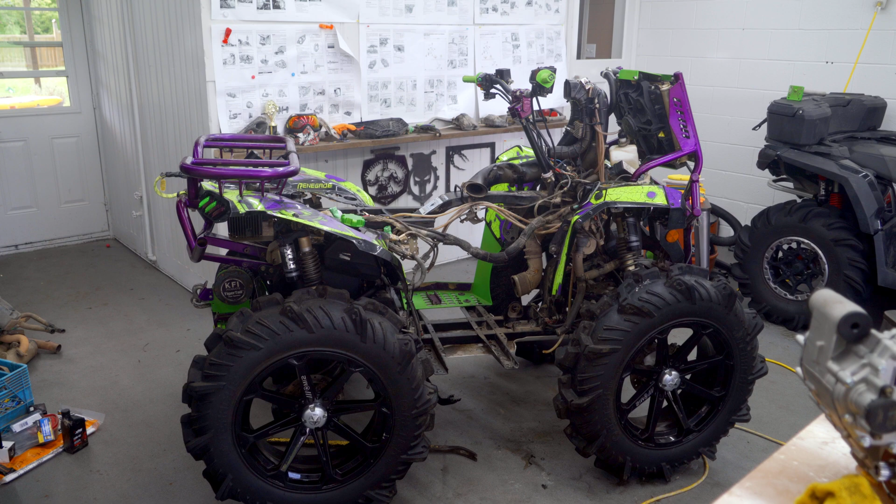On this episode, I'm going to show you how to put an engine back into a 2020 Can-Am Renegade XMR 1000R. Same way you take it apart is the same way you put it back together. So let's get to it. Let's get that engine back in the frame.

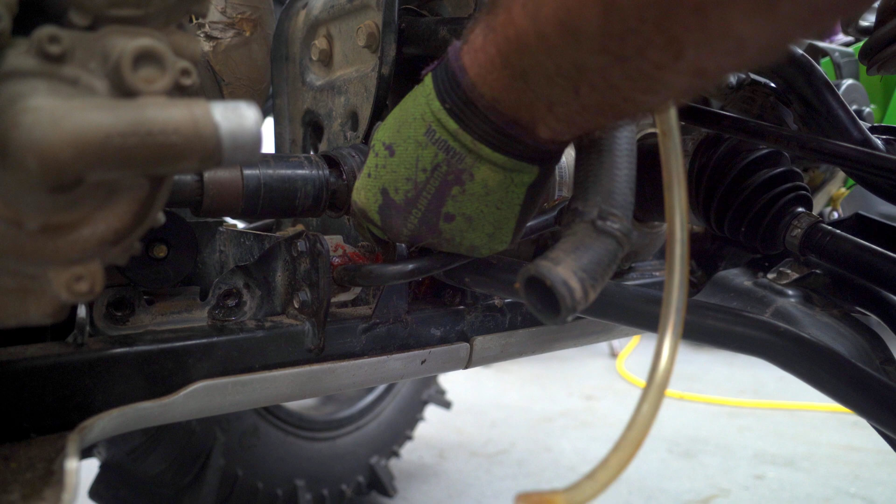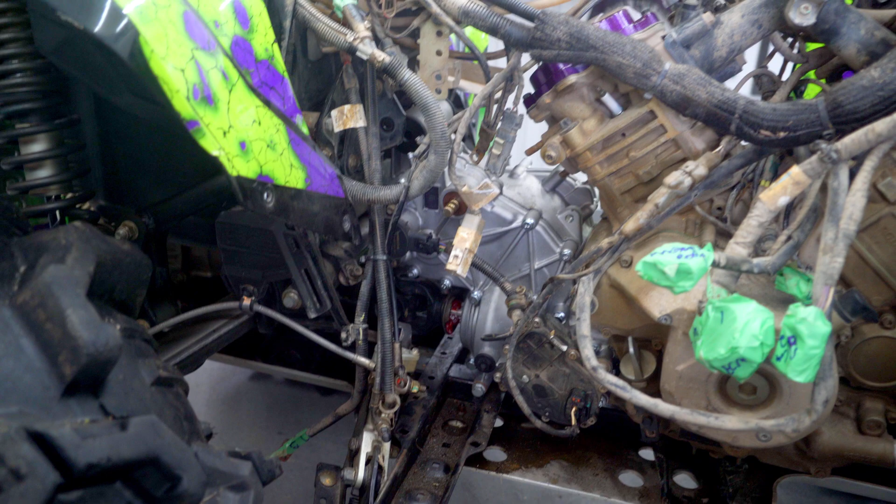Slide your prop shaft in. Have to get all the clamps back on there. New Oetiker clamps. But make sure that you put this in before your engine bolts. Before you push the engine and gearbox back in, make sure you line up your drive shaft splines. They're a lot easier to line up right now while everything's loose.

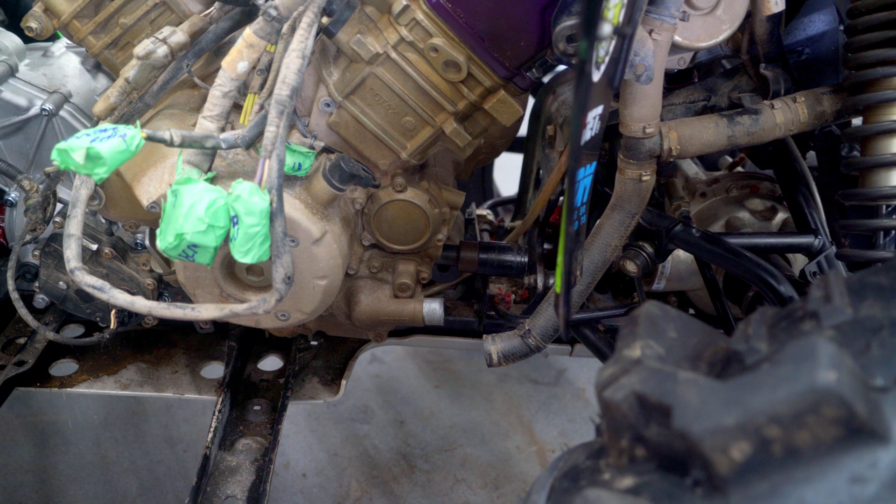I have things kind of lined up for the upper engine mount and the lower one down there. So now we're going to slide her into place. Little movements now, right? Make sure that you're not pinching anything and everything's routed the proper way. I think I'm good there. This guy here, when you slide it back, make sure you flip that back over the throttle body. Pretty important to make sure it's on the right hand side before you put all your engine bolts back in. And then now I'm going to keep it on here until she gets into place.

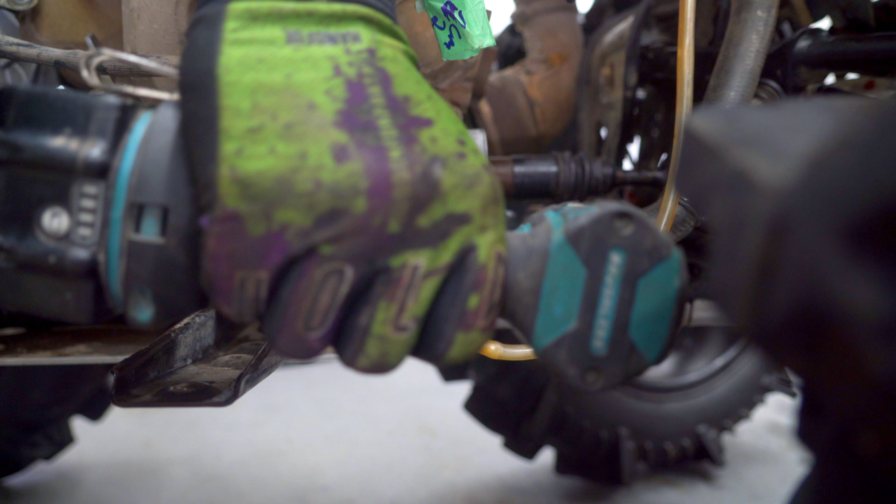Tight. A little bit of blue Loctite goes a long way. Upper engine mounts up here. Threads right into the engine. 15 mil. And all I'm going to do here is snug everything up, because I'm going to make sure that everything is in the right spot before I start tightening everything down.

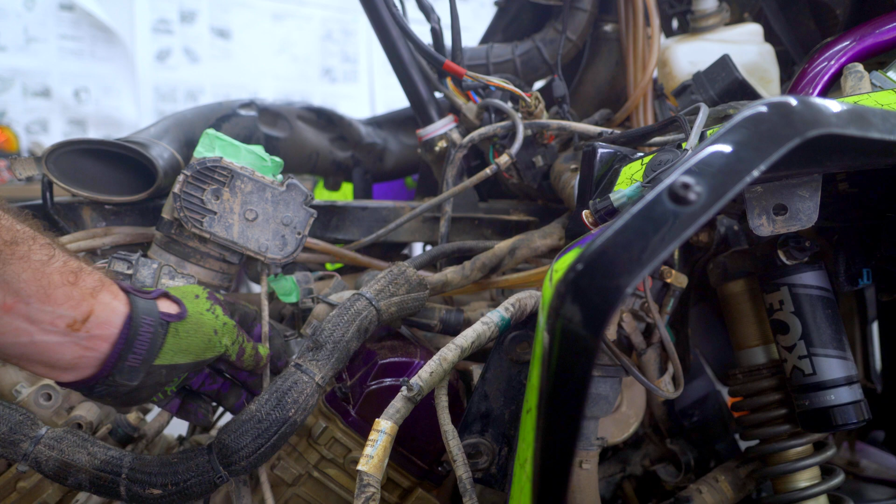Now we start running our electrical and everything back to what it's supposed to be connected to. Spark plug wires up here. The shorter one goes to the front cylinder. The longer one up here goes to the back cylinder. Route it however you see fit. I'm gonna route it back the same way that it came.

Voltage rectifier right here. This guy here, yellow on it. This guy goes under the back, over on the back side here. So we're gonna run that back, and that has to go through here, underneath, and plug in the back. A little bit of dielectric grease on it goes a long way. Let's get that done.

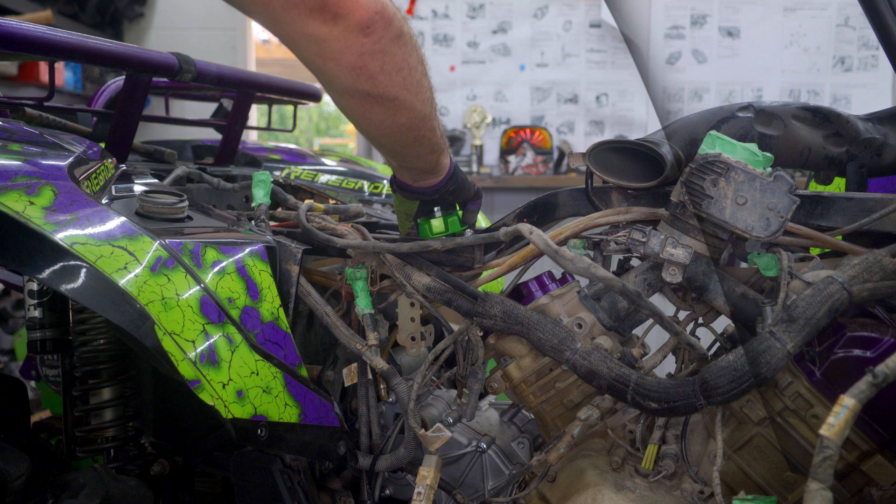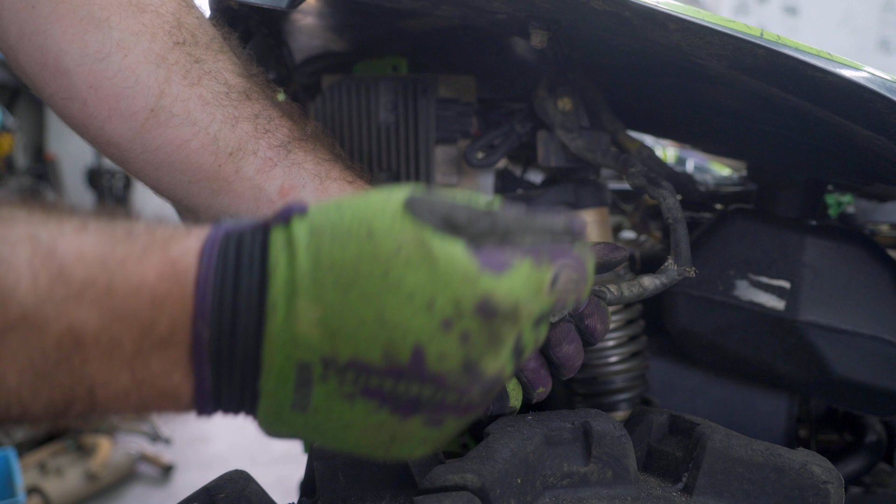A little bit of dielectric grease in the connection before we put it back together. Make sure that you don't get it on the actual contacts, because remember, dielectric grease is not a conductor. It's an insulator. So the whole idea of it is to keep the water out, not improve the connection. Got it? And we'll need some cable ties to clean this up a little bit for cable management. Other than that, we're good to go. We'll do something like that.

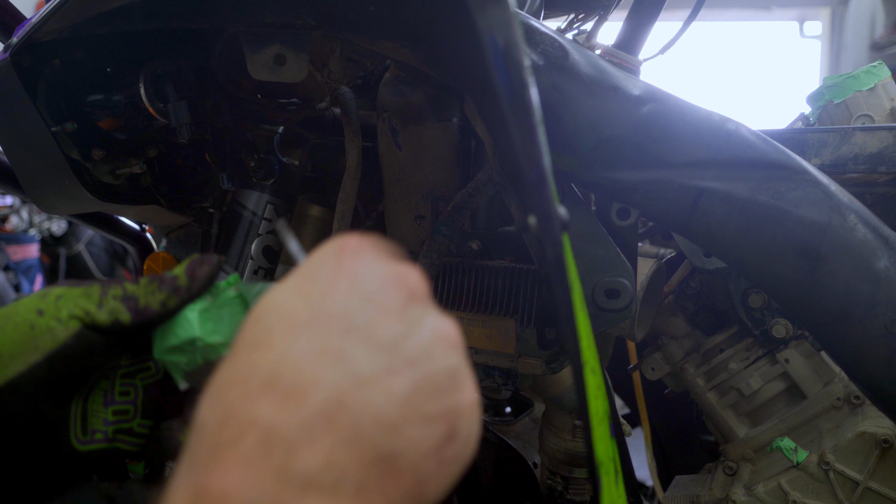Engine ground is right here. This one reconnects to the screw here. Got to run your main connectors, ECM and ECM2. That's how I label them. Make sure when you're putting it in that you run it across the motor like this, and then this is going to run through to the front, back to here. A little bit of dielectric grease, clean those up, pop them back on, good to go. Oh yeah, good sound. Good.

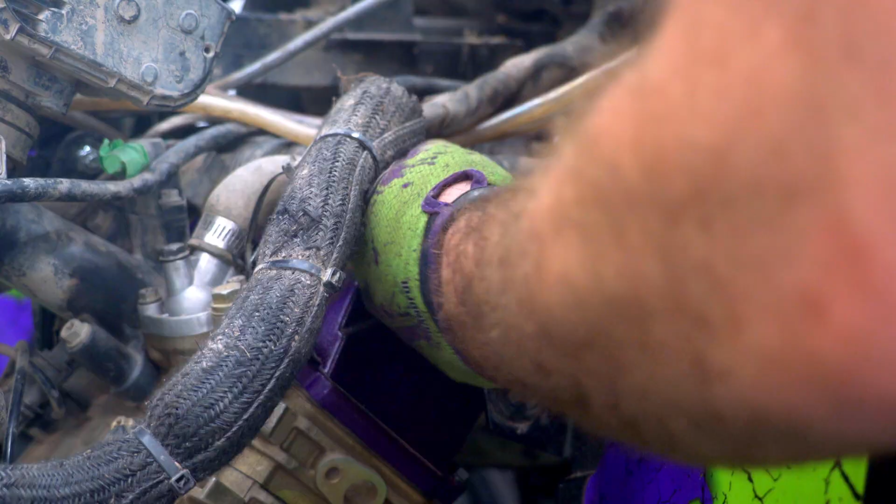Gotta reconnect the magneto for the spark plugs once you put the spark plugs in. That's kind of up and round and under here. It's difficult to get to, to say the least. There it is. Boom. Got her. Gotta reconnect all your coolant lines, upper and lower. Reconnect the upper. There she is. And then the lower. And then this vent line goes underneath here. Boom.

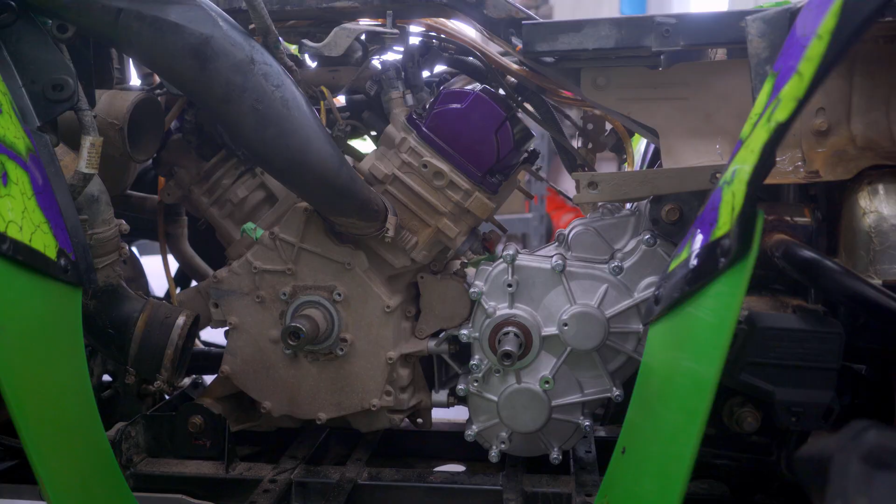Support. Gonna reinstall this just to route everything properly. And then I know where everything's supposed to actually go. Reconnect your injectors. Rear one here, front one here. Reconnect your positive starter cable over here. Time to reinstall the exhaust.

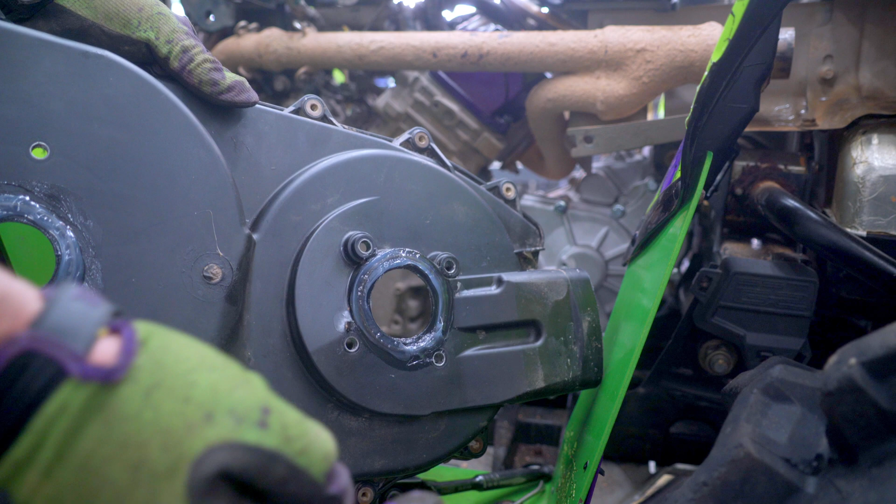Clutch backing plate. Make sure you put the O-rings back in where you found them. 1, 2, and a little bit of silicone around the perimeter goes a long way for keeping water out. Because these leak. From brand new, these leak. We've had so many machines that they always leak in between here. So, slap this guy back on, and we're good to go. Don't forget your coolant. Really important.

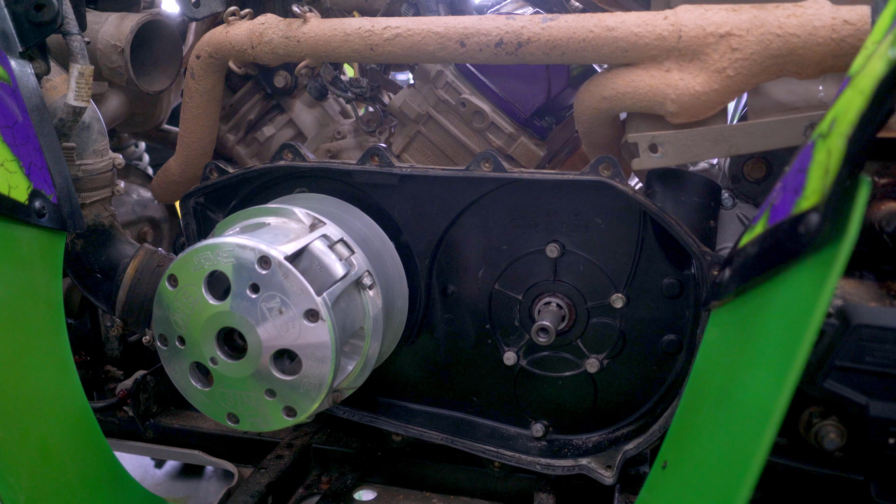Time to reinstall the clutches. I have aftermarket clutches, so I can't show you how to change those. This is where we're at. Secondary. Make sure you line up the splines in the transmission before you push it all the way back. And there she is. And then we can spread it, put the belt on, put the primary bolt in, secondary bolt in, torque everything, good to go. There we go, belt's on, back the spreader up.

Primary, if you have an STM, it's 80 foot-pounds. And a screwdriver holder works great. Come on. There she is. Torque. Secondary, 40 foot-pounds. Which isn't much. And we're rolling.

Crankcase vent line hose. Don't forget to reconnect that guy on your air box. Tucked underneath here. That's that one there. Pops on right here. Under the crankcase there. There we go. Connect your CVT intake and exhaust. Your actual exhaust. Heat shield on. Check everything over, make sure everything's good. That's where we're at.

Put the airbox back on. Make sure everything lines up before we push her back and clears in the center here. Air intakes and everything. There. Sweet. The 2 bolts here, you gotta do those 2 up. The one in the front, couple on the side. Make sure that your power and everything's ran properly. And then we can fire it up. Make sure it actually works. And then final assembly.

Okay, now I'm going to top up the coolant. We got it running. Very happy. Good news. Alright boys, drive shaft bolts in. Prop shaft oil clamps are on. I'm kind of in final assembly now. Plastics, you know, the rest of the bling bling, you know how to put those on. So there's the Can-Am engine install.